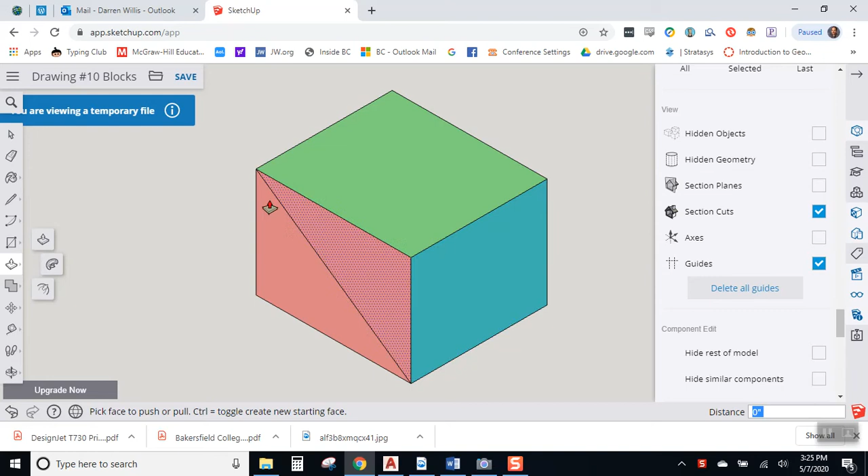Let's move on, shall we? Let's talk about something new and exciting. Let's talk about angles. See, because up until this point, everything that you drew was either a horizontal plane or a vertical plane, right? There was nothing on an angle. Well, we're going to change that now.

So, let's find a good color for our angled stuff. I think yellow would be nice. All right. What do you think? What is this thing going to look like from the front? And what does this thing look like from the top? And what's it going to look like from the side?

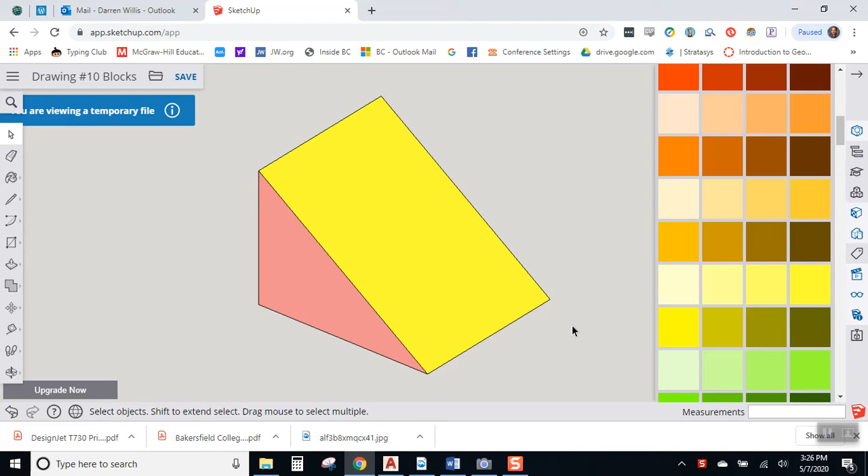Any ideas? Any thoughts? Can you visualize it, flip it around in your brain, and get an idea clearly of what the front view is going to look like? Well, if you can, that's great. And you know what? If you can't, don't sweat it, right? You're developing your ability to visualize. So, what do we see in the front view? We see a right triangle.

Okay, so I'm going to go over to my sketching paper, and I'm going to set up my bracket, and I'm going to draw that right triangle. And that is my front view. Now, projection. What do we know about projection?

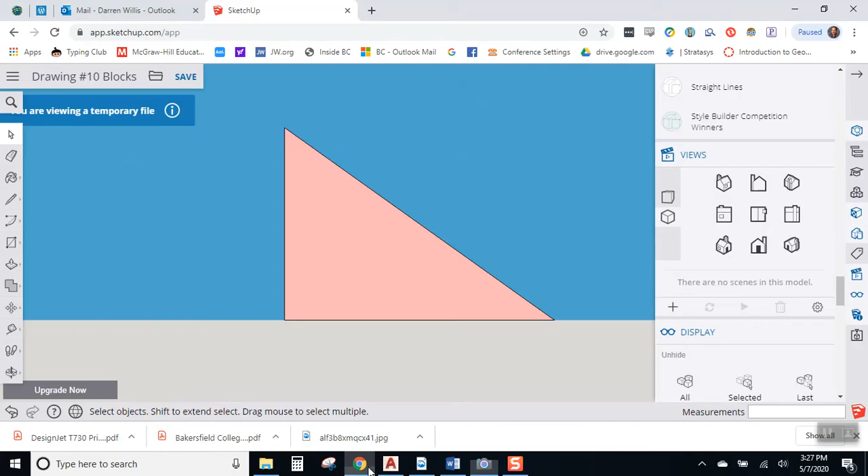Well, here's a corner, it went up. Here's a corner, it went up. Here's a corner, it's going to go up, right? And these two corners go over, so this corner also goes over. So those are our basic projection lines. What about the shapes, though? What about that top shape? What shape do you think it's going to be when we look straight down on it?

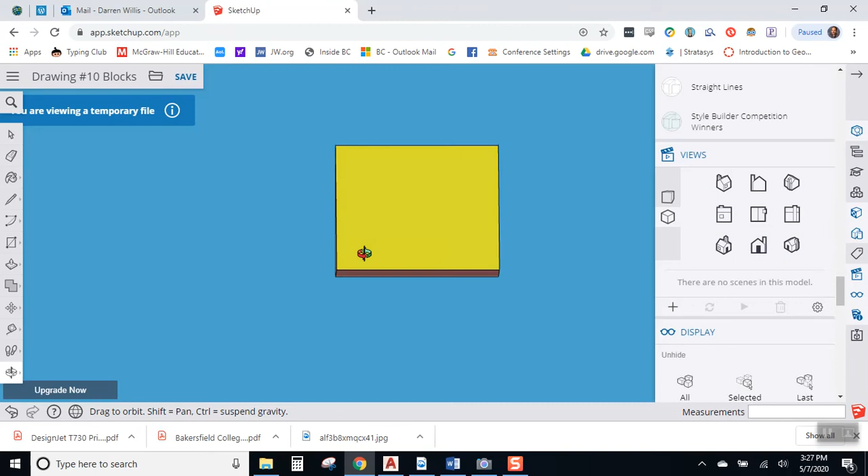Now, this might be a little surprising to you. Check it out. See, the shape looking straight down on it is a rectangle. Is that a surprise? Were you expecting something different, maybe? How about if we look at it from the right side? What shape are we going to get? See, got another rectangle. And again, I think for some people, that's going to be surprising.

Okay, but think about it like this. Were you ever an adventurous kid with a bicycle or a razor scooter or some rollerblades, and you decided you wanted to jump through the air? Didn't you go get a piece of plywood or a board and maybe put it on a brick or a couple of rocks or a log to make a ramp? Well, think about it. What was the shape of that ramp? More than likely it was rectangular, right?

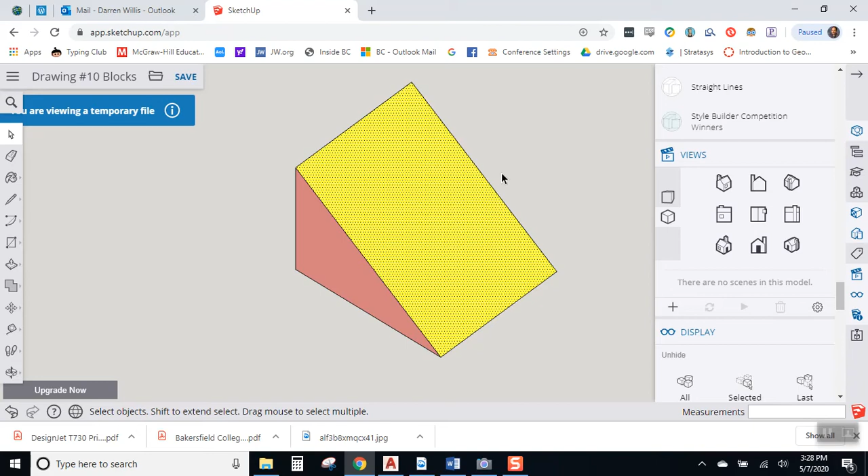So it shouldn't be a huge surprise when we go over to our drawing and realize that the top is simply a rectangle. And the right side is also a rectangle.

Okay, there is nothing in the right side or the top that tells you that this is a slope. There's no little arrow pointing down, there's no shading or shadow, there's no highlight, there's no clues that tell you this is a ramp. The only thing that tells you it's a ramp is this front view, right? So without the front view, you might not know what this thing was, but with the front view, we can see that this is a ramp.

Now, I'd say this is surprising for some people. Maybe it wasn't for you, but I always get students that want to do, I don't know, weird things when we start drawing these. And I kind of blame it on art. In art, we try to make things look very realistic. So I've had lots of students that when we get to this kind of a drawing, will do this for the side view.

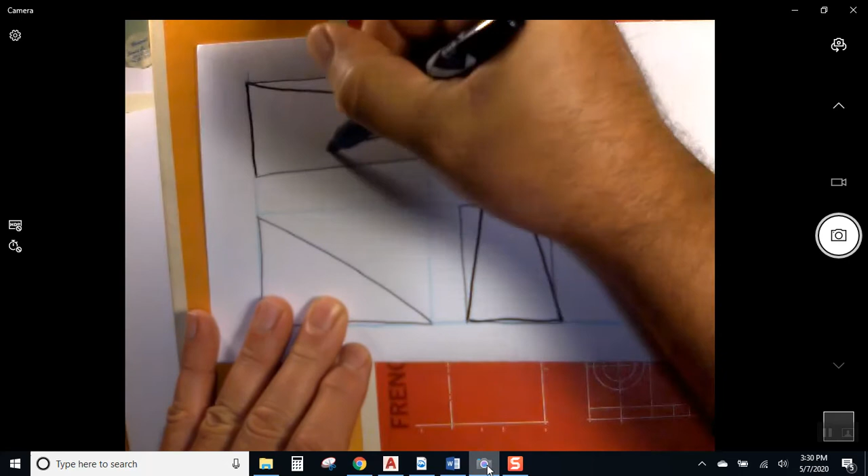Yeah, can you imagine why they're doing that? Why they're making it smaller at the top than at the bottom? You know, and they might even do the same thing up here. They might make it smaller at the low end than the high end. Okay, why would you do that?

Well, again, I blame it on art, because in art we try to capture the essence of things, how they really look. And you know, if you were standing at the bottom of a long ramp, it might look like it gets smaller as it goes away from us. See, I blame this on perspective. The idea that the train tracks look wide apart when they're close to you, and they look like they almost touch way at the end as they go away from us.

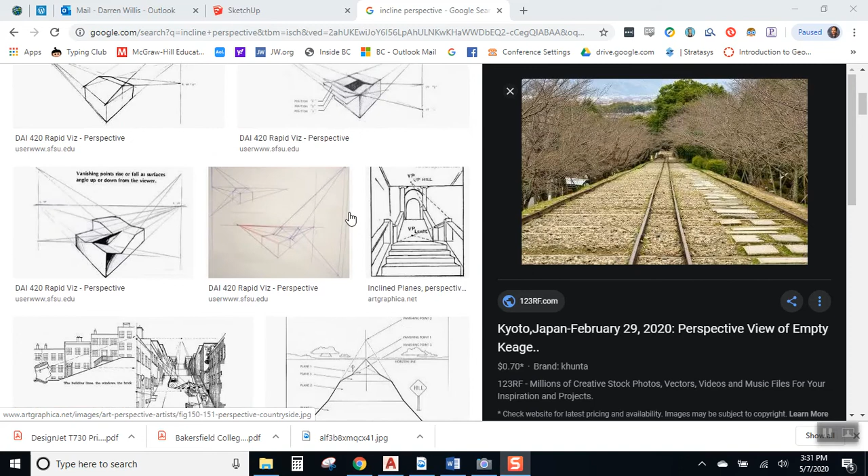Right? So this is an artifact called perspective, and the idea is things appear to get smaller as they go away. Here someone has drawn some stairs in perspective, and do you see how it looks like the stairs are getting narrower as they get toward the top of the staircase here? Yeah, but in reality, this stair is just as wide as this stair here. What's happening is a little optical illusion.

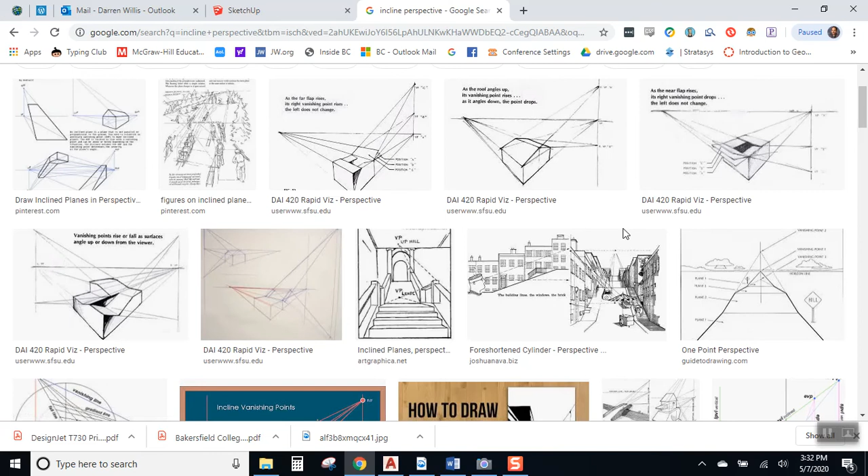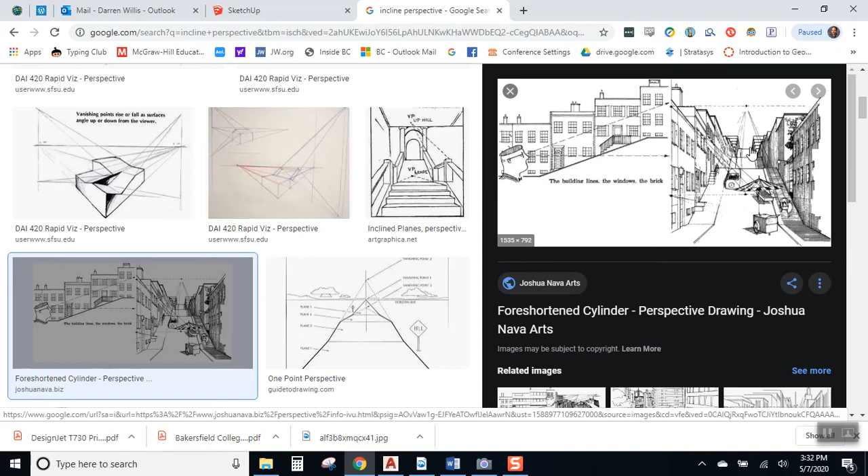Now, that would be fine in an art class, okay? But we're not trying to draw things like in an art class. Here's another one. Look at this street. It's wide here, and narrower there, and narrower there, and even narrower back there, right? So if we were drawing it in an art class, we would try to aim for realism and aim for perspective, but we're not. We're trying to draw the true shapes, right?

So the true shape of the front is a right triangle. The true shape of the top is a rectangle, and the true shape of the side is a rectangle. There's no trapezoids anywhere on this. You know, here's another one, right? This is a ski ramp, a ski jump. Do you see how wide it is where you are? And do you see how it looks like it gets tapered as it goes further away from us? 150, 200 feet downstream. It looks like it got narrower, even though it really doesn't.

Okay, so, hey, nothing wrong with art. I love art, okay? But leave the trapezoids in the art class, and for this class, focus on what is the true shape that we're working with. And in this case, rectangles.

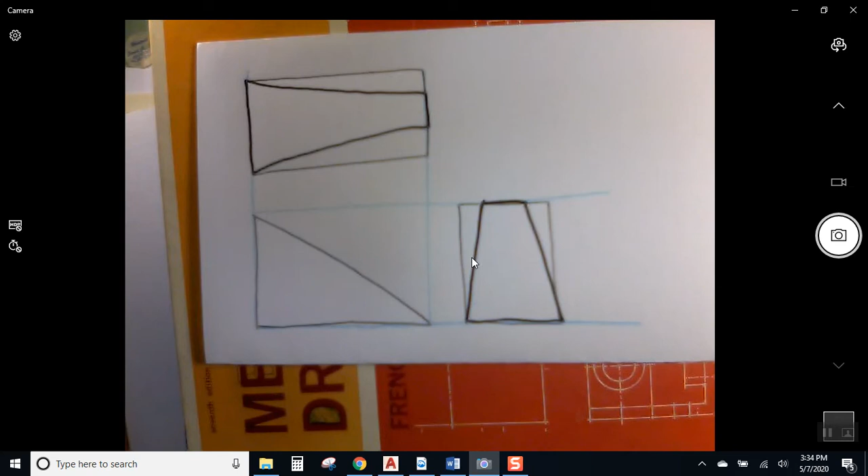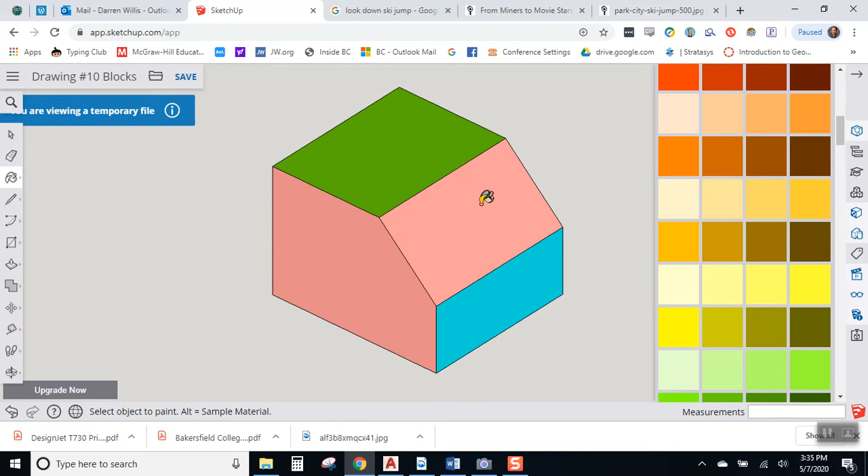For our next example, make it nice and simple. We'll go back to our simple little block shape, and I'll draw a bevel on the corner here, a chamfer, and then push it through. And we'll get our angled face color. So now, can you visualize what the front view is going to look like? How about the top view? And then how about the right side view? Can you kind of string together what those views are going to look like based on what you see on the screen? Can you imagine the different shapes that are involved?

Okay. Gonna head over here to mission control. I'm gonna set up my bracket. And I'm going to set up my front view. And my front view looks like a square with the corner chamfered off. Easy, right? And then projection time. Project up, project up, project over, project over.

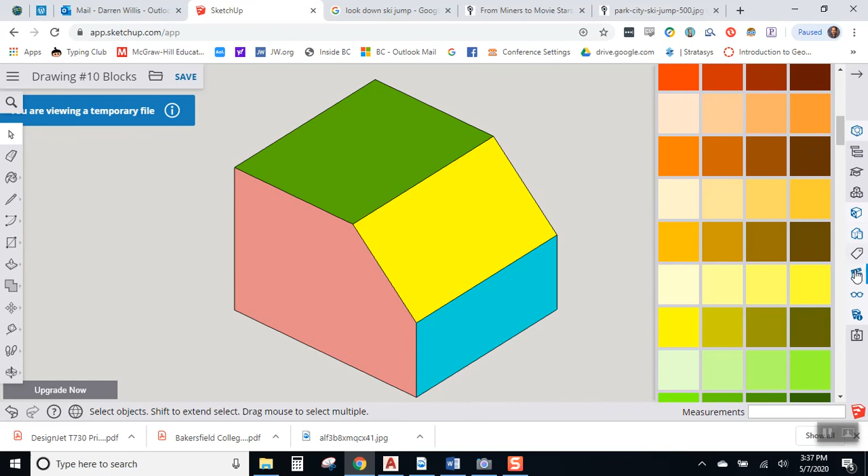What should we get when we look down on this thing from above? Okay, so we have the horizontal flat plane there, the green one, but we also have the angled plane, right? So we have two rectangles. Two rectangles.

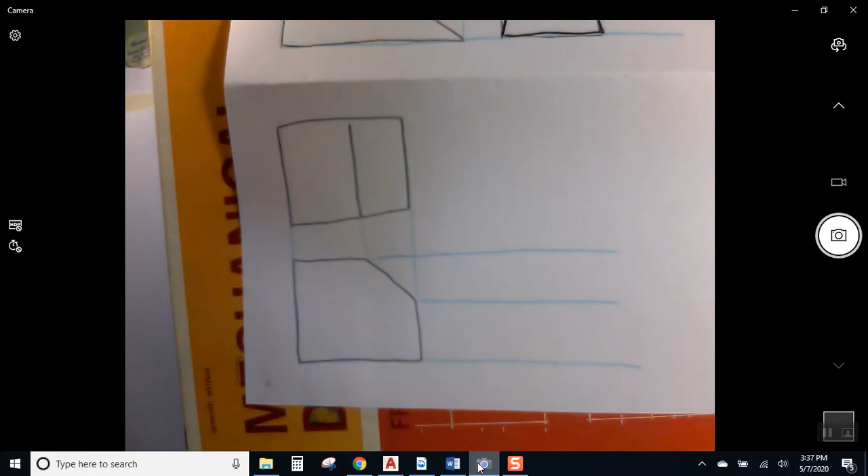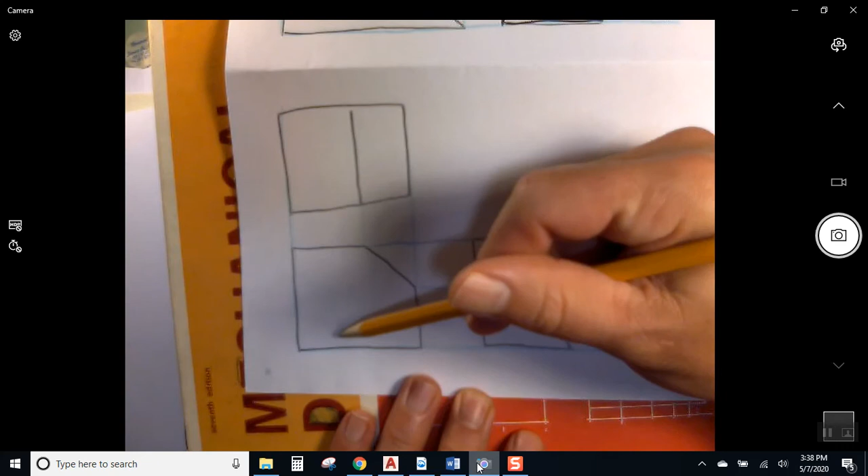Very good. And then how about the side view? What are we going to get for our side view? Again, let's take a look. Two rectangles again, but this time they're on top of each other instead of next to each other. Any hidden lines? Absolutely not. Right? There's nothing hidden. All the corners are projected into each view.

This is a terrible drawing. My apologies. Just understand I'm standing on a step stool at home in the corner of my bedroom under, well, I'll have to show you a picture of my camera setup. You won't even believe it. Okay, I think you'll forgive me though when you see it.

So, this is our setup that shows our chamfer. That's the chamfered face there, and that's the chamfered face there.